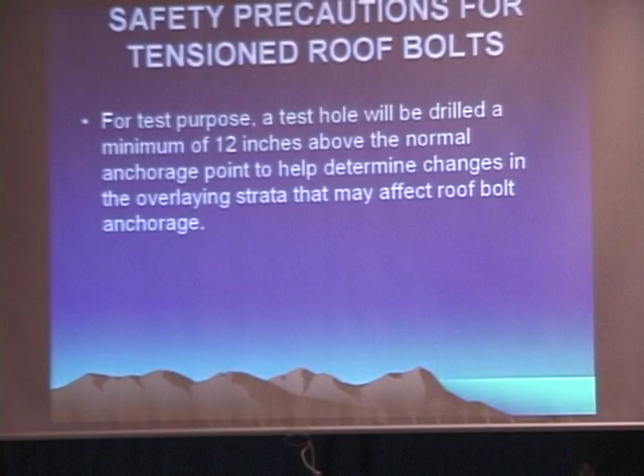This is automated temporary roof support safety precautions. All roof bolting machines operating in a working section shall be equipped with an approved ATRS. Again, that's that thing that goes up against the roof.

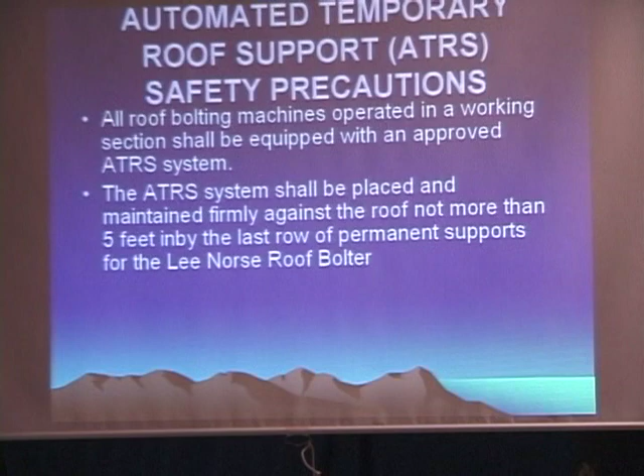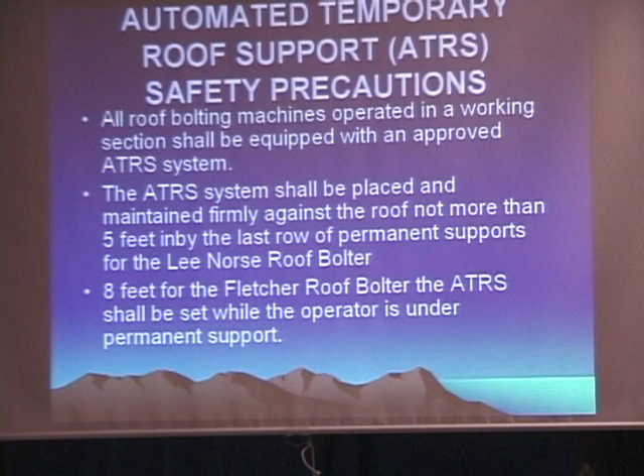The ATRS system shall be placed and maintained firmly against the roof, not more than 5 feet in by the last row of permanent supports for the Lee Norse roof bolter. That's that little twin boom, or the little single boom we've been using. 8 feet for the Fletcher roof bolter, which one we're using now. So we'll have an ATRS that's 8 feet in front of you while you're bolting.

Entry widths, room widths, crosscut widths will not exceed 20 feet maximum. Again, we got in a lot of trouble over this last while. We've been training new miner operators. We want the guys to maintain 18-foot roadway because you're going to get some sloughage.

You mine at 18 feet, you get a foot slough off of each side, you got 20 feet. You go over 20 feet, we got to add additional supports. We had an inspector in there a few months ago. We found places that was 26 feet wide. We found a lot of places 22 feet wide. And again, it's just because the guys aren't paying attention.

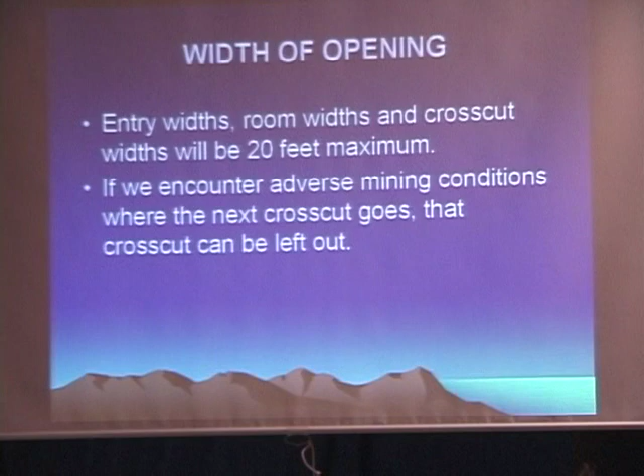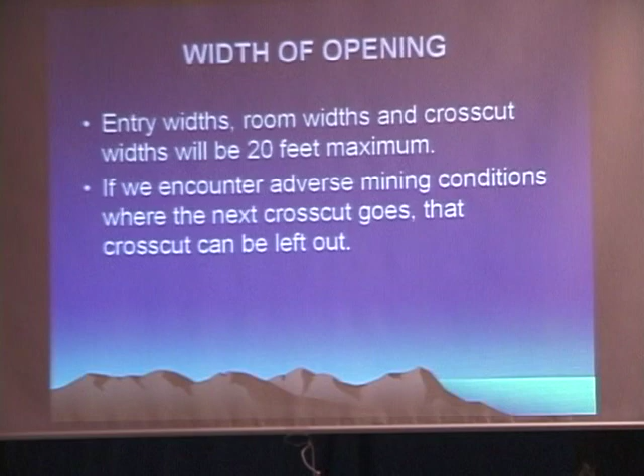Training new guys. If we encounter adverse mining conditions where the next crosscut goes, that crosscut can be left out. And technically what that means, we've got in our plan it says our crosscuts can't be more than 200 feet apart. If where we want to make a crosscut we've got a fault, some big cracks in the roof, some kind of bad top, we can leave that crosscut out and go with the next one.

This is just a little bit of a diagram to show you the steps of the mobile roof supports. Right now, again, we're pulling pillars. We've got those big mobile roof supports in there to hold the roof up. The main thing is on those mobile roof supports, we need to use them in pairs. We never move one without the other. We've got into a lot of trouble where guys thought there's no problem, the roof's not working, it's not heavy, they let a mobile roof support it down, tram it out, let the other one down, the roof caves.

So this is showing a sequence of mining where we'll go in, we'll take a cut off that right pillar, we'll move the mobile roof support up to cover about half of that cut, we'll take a cut off the left pillar, we'll move that roof support up, we'll move them both up, then we'll take the next cut off the left, we'll take 2 cuts off the left, just keep moving those mobile roof supports up. That left side is actually a barrier pillar, so we're just kind of robbing along the barrier, the right side's the pillar. We move around the pillar, get between those other 2 pillars, we pretty much do the same sequence. Do a left cut, a right cut, left cut, right cut. We get right down to that number 11 cut, that's that final push.

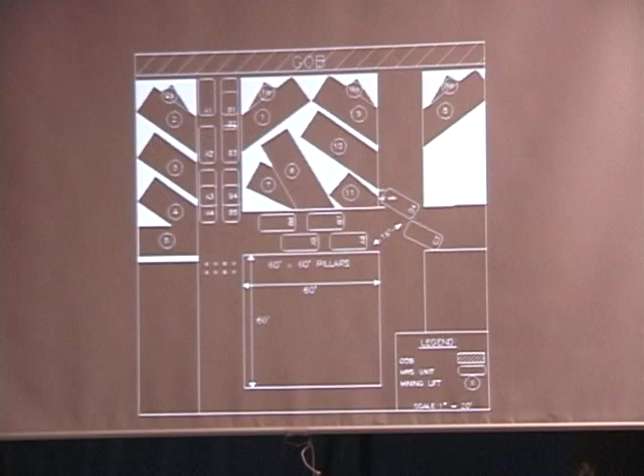Get out and go to the next one. Now, go ahead and go to the next slide. What we've done, we formulated about 4 of these different plans.

MSHA wants you to put down in writing exactly 1, 2, 3, 4, exactly how you're going to do things. You find when you go in there and start pulling pillars, every pillar is different. You can't do every one of them the same.

So we've come up with several different ways to do it, different size pillars, different cut sequences, so that no matter what we get into, we'll be able to get the pillars out right.

The big trick is we can do just about anything we want. The big trick is the guys that's in there need to be smart enough. When an inspector comes in, you can pull this plan out and say, we're on this cut right here.

When it's all caved all the way around you, it's really hard to tell what you've been doing. But you need to be able to show him on the plan what cut you're doing. And again, this is just one of the sequences we can use.

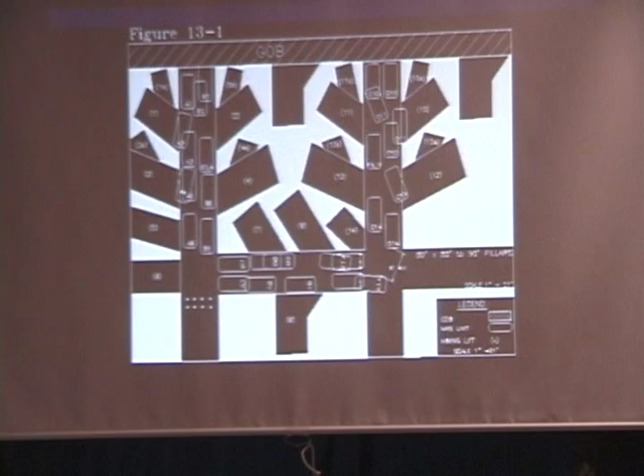There's one more. This is the sequence that we pull the pillars in.

Up at the top there, we get up on the very far. We've got our bleeder system. We leave usually 2 rows of pillars, leaving that one entry open so air can circulate all the way around the gob area.

Those slash marks are the gob where it's already caved. So we'll start on that left side, or that's where we're at. Pull the pillars 1, 2, 3, 4, 5 all the way across.

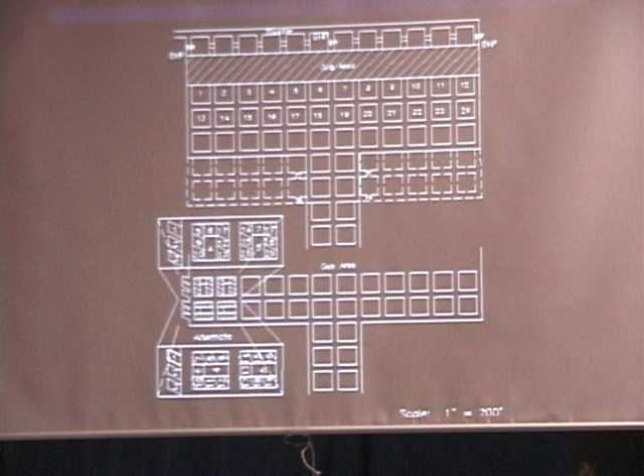This is a sequence. If we get into a place where we've got a caved area on the left or on one side of us and in front of us, which we are right now, then we'll pull them with this sequence.

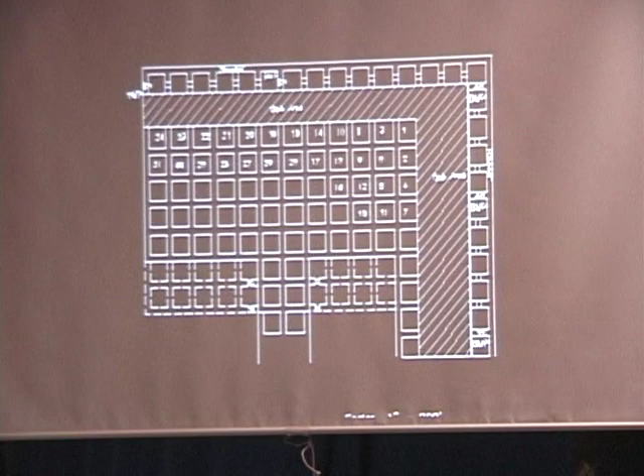Any type of material we use for roof support needs to be approved by MSHA and included in our plan. So we've got a list, listed in the roof control plan, of the roof bolting materials that we are approved to use for roof support.

And it may include the style, length, and diameter of roof bolts, fully grouted, mechanical combination, size of bearing plates.

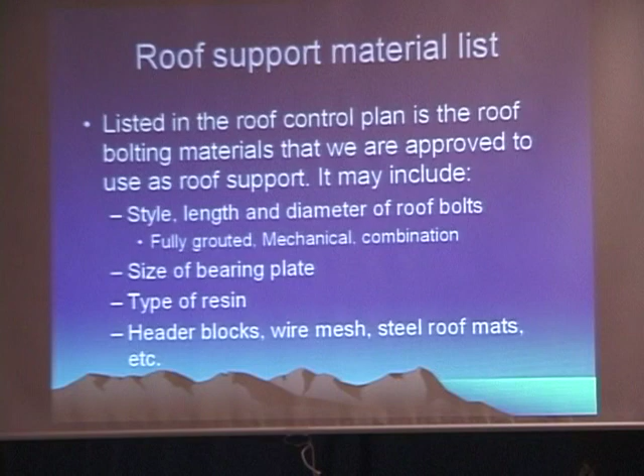Type of resin, header blocks, wire mesh, steel roof mats, a lot of other stuff. There's a pretty big list, longer than that in the plan, so we can use about anything we can find.

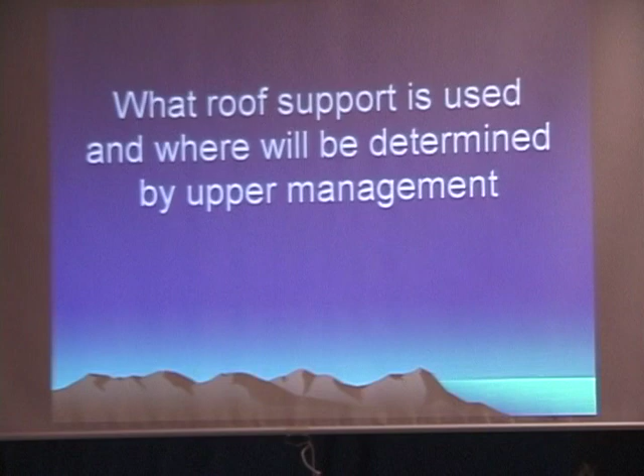What roof support is used and where will be determined by upper management.

Now, one thing, anybody that's a roof bolter operator, that is a real critical job. There's 2 things that we got to look at. First of all, he's the guy that's trying to make the roof safe for everybody else.

If you don't install these bolts properly, you don't get the resin mixed right, you don't get the bolts tight against the roof, we're in trouble. Somebody could get killed.

He's the guy that's going to know what kind of roof we've got up there. Is it solid sandstone? Do we have mud bands? Has it got a lot of cracks in it?

He's the guy that's going to tell us that. He's not the guy that will make the determination of what we will do, but he's the guy that needs to let us know if there's any change. So he'll go to his supervisor, his boss, and let him know that we're hitting something different.

Precaution for drift openings and while mining within 150 feet of the coal outcrop. Again, drift openings are like our portals where you go in the mine.

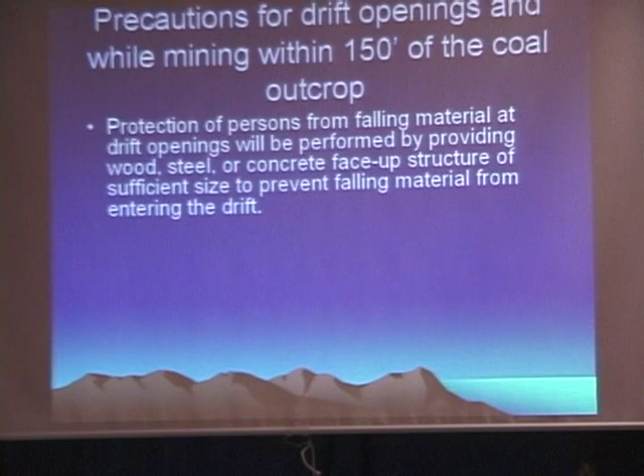Protection of persons from falling material at drift openings will be performed by providing wood, steel, or concrete face-up structures of sufficient size to prevent falling material from entering the drift. The drift is the portal, the opening going into the mine.

When mining within 150 feet of the outcrop or known faults or burns, and adverse roof conditions are encountered or anticipated.

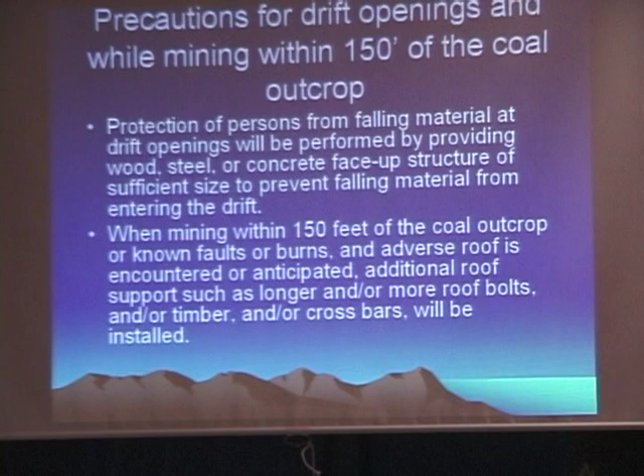Additional roof support such as longer and/or more roof bolts and/or timber and/or crossbars will be installed. And again, where we're mining, just a while back we mined out, we hit dirt.

We got to the edge of the mountain, we hit dirt. And so whenever you get in areas like that, there are some precautions you need to take. The roof is usually not as stable.

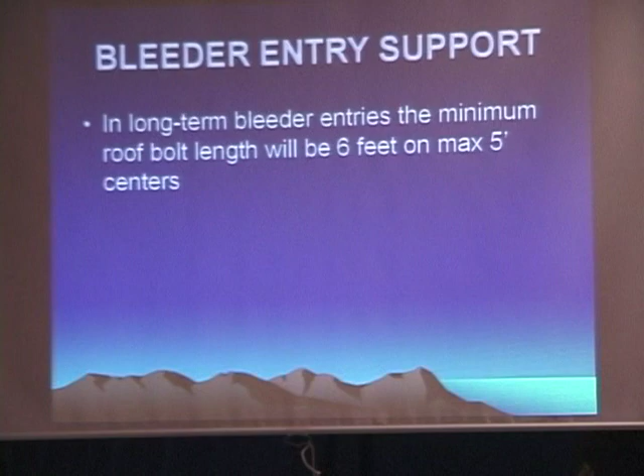In long-term bleeder entries, the minimum roof bolt length will be 6 feet on 5-foot centers. I think we got that changed to 5 foot on 5-foot centers. Where roof bolt is not adequate to maintain the bleeder entry, a center row of timbers or cribs will be maintained. The timber or crib spacing will depend on the type of roof.

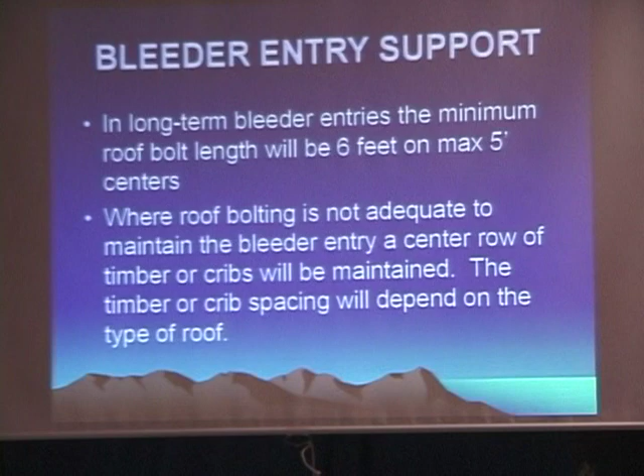Now when we get this longwall system we're putting in, a lot of you guys are going to get a lot of experience setting cribs. Our bleeder entries, our tailgate entries, we got to keep them open. We will be setting a lot of cribs and timbers in them.

All persons required to operate the mobile roof support shall complete the required task training, including safe operating procedures. No person shall be permitted inby the miner operator while coal is being mined. While repositioning the mobile roof support, no person will be allowed inby the outby rib of the last lift. Again, you stay out of those intersections when you're moving them. We have those things set in there to hold the roof up. Now we're letting it down. There's a good chance the roof is going to fall.

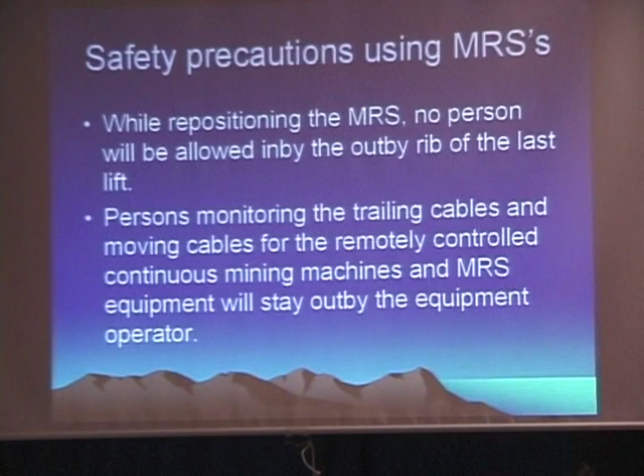Persons monitoring the trailing cable and moving cables for the remotely controlled continuous mining machine and MRS equipment will stay outby the equipment operator. Before each lift is started, the MRS shall be set firmly against the roof at a pressure which will provide compression of the strata immediately above the seam. Pressures may vary from 1,000 to 2,400.

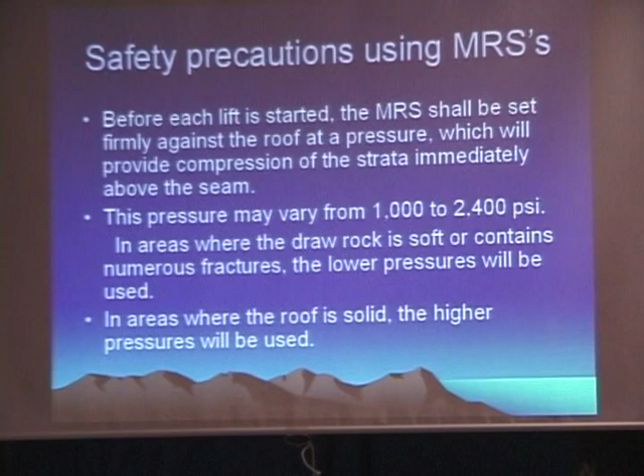Now all these mobile roof supports, guys can see them, they got great big pressure gauges on them. You can see them from 100 feet away. When you're setting them up, if you're in an area where you got good solid sandstone roof, you'll set them up to 2,400 PSI. If you got some loose top there, you can push these roof supports right through the top. So if it's a loose, soft roof, you keep it down to 1,000. In areas where the roof is solid, the higher pressure will be used.

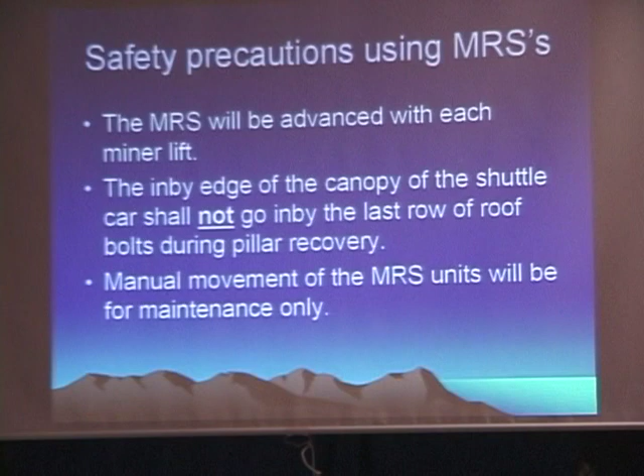The MRS will be advanced with each miner lift. The inby edge of the canopy of the shuttle car shall not go inby the last row of roof bolts during pillar recovery. Manual movement of MRS units will be for maintenance only.

Now again, these mobile roof supports are remote controlled. They do have some onboard controls on them. We have a problem a lot of times, guys will go get them and move them across the section using those hand controls. That's a no-no. It's not allowed. The only time you use those hand controls is when they're doing maintenance. They have to lift the canopy up and down or are doing maintenance on it. You use the remote control the rest of the time.

Breaker posts may be knocked out to allow the MRS units to be set. Again, along the gob line, we have to set breaker rows when we come to pull the pillar. We want to put the mobile roof supports in there, so we'll push the timbers out with the MRSs. Okay, if the breaker posts are knocked out, only one MRS at a time will push the post out on only one side. The MRS will be set against the roof before the second MRS is used to knock out the post on the other side and then set in place.

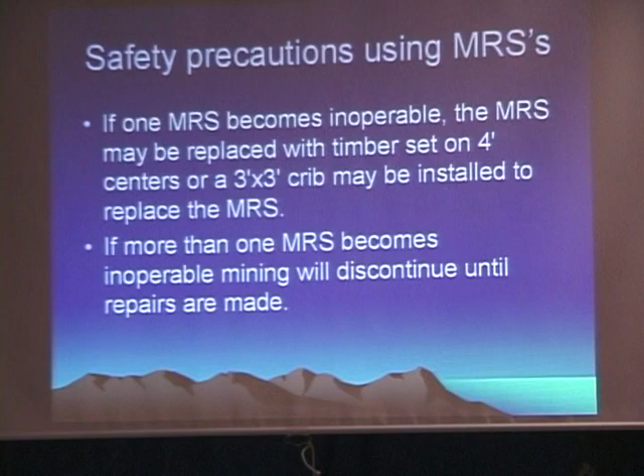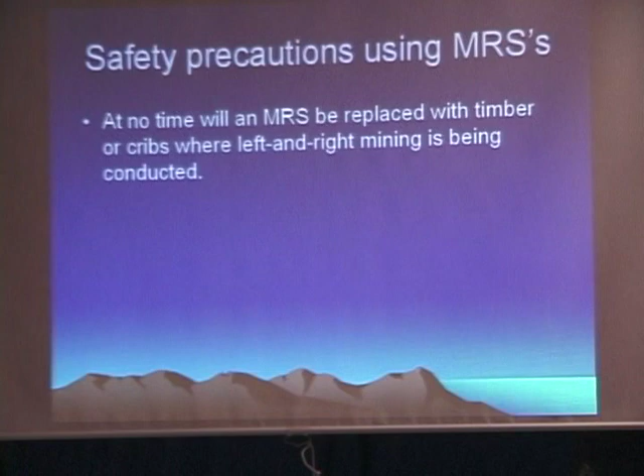If one MRS becomes inoperable, the MRS may be replaced with timbers set on 4-foot centers, or a 3x3 foot crib may be installed in place of the mobile roof support. If more than one MRS becomes inoperable, mining will discontinue until repairs are made. Again, we've had this happen where one of these mobile roof supports will break down for a while, we can replace it with timbers or cribs. If two of them are broke down, we've got to get at least one of them fixed before we can mine.

At no time will an MRS be replaced with timber or cribs where left and right mining is being done. Again, on those pushes, when you're coming out, you're pushing left and right, you need two roof supports in there, which that's all you're ever using anyway, is two of them. So it's just out on that final push you can use timbers or cribs to replace one.

While mining the final push-out stump, one inoperable MRS may be replaced with timber or cribs as long as the roadway leading into the stump is maintained at 16 feet or less. And that's whether you're using the cribs or not. The roadway can only be 16 feet. The inoperable MRS will be repaired as soon as possible.